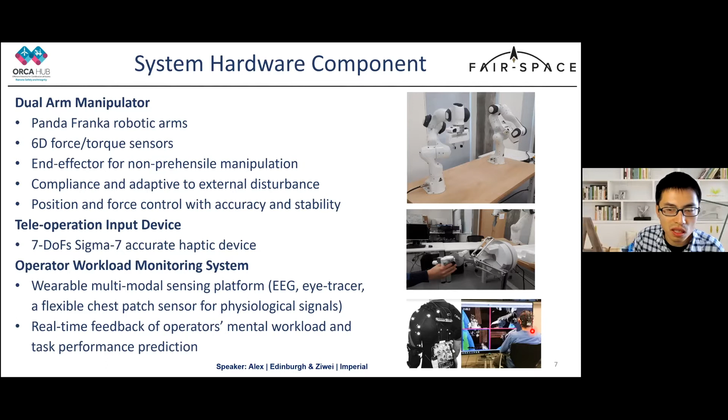As you can see, the human is sitting in front of this multi-modal interface, with EEG and eye tracker, etc., to monitor the human load.

Specifically, we design missions similar to space construction and assembly of large structures, as mentioned before. Here's the setup we use. We applied industrial connectors and a modular design like this to resemble space debris removal in terms of capturing the object, and also space assembly in terms of docking and connecting different standard modules. So this is how they're connected.

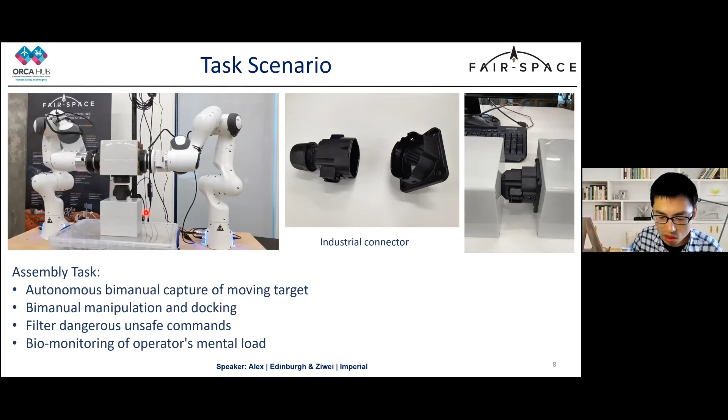On the remote side, there are two components: the remote side local control. The local control has two parts. One is variable impedance control with adaptations, so any mistakes or human errors will be naturally corrected here to ensure it's safe to operate in space.

Another autonomous mode will naturally take over when the human mental load increases, or when the communication delay increases—when there's too much latency, loss of packages, etc. When the communication is compromised, we automatically switch to autonomous mode. This dual mode operation ensures the resilience of the tasks.

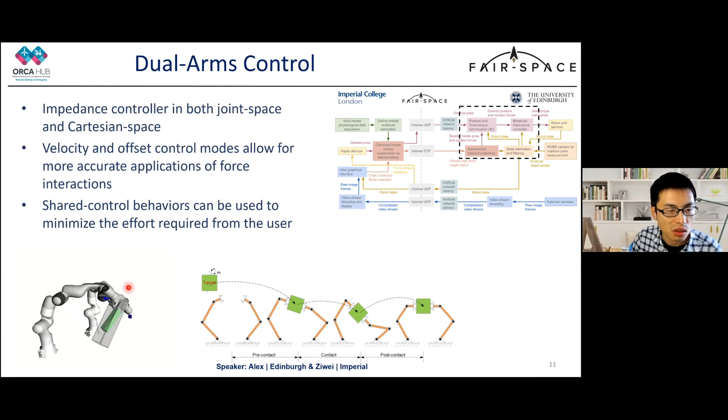Here is a simple demo to show: the operator can give an arbitrary command, but the robot will do exactly and precisely the safe motions as much as possible, so nothing is violated. All the physical constraints are compliant here to ensure safety and feasible operations—this is very good to prevent any human mistakes.

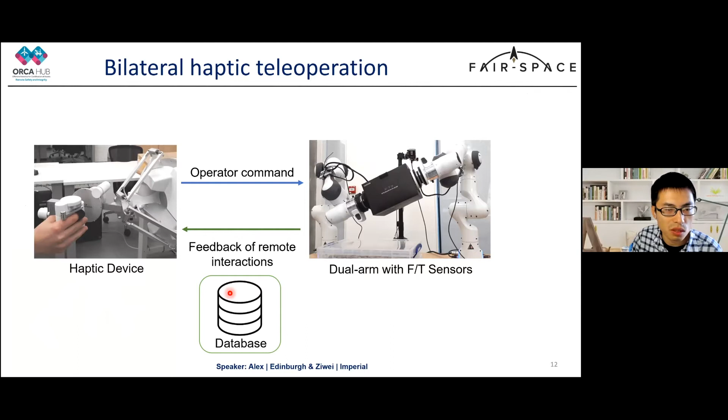Given this whole structure, we are able to collect a lot of operation data. When teleoperation is running in normal mode, we collect a lot of data and establish a database. As you can see, we can perform grasping tasks, for example, grasping and manipulation tasks using the dual arm.

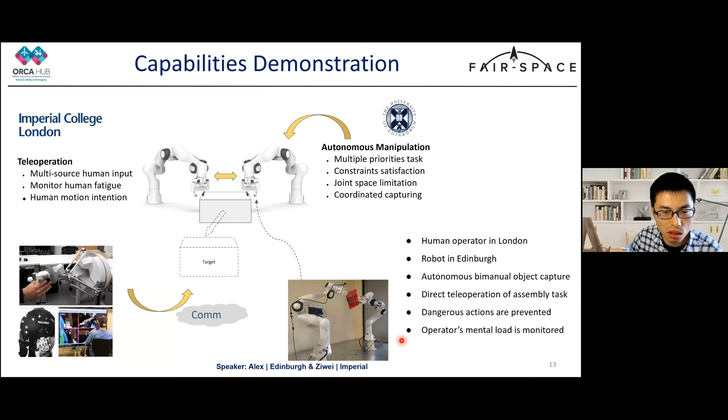We are going to show a lot of demos—not just grasping, but also docking. For example, here you can see the docking task demo. Similarly, we can perform a lot of demos, and I will move to the next.

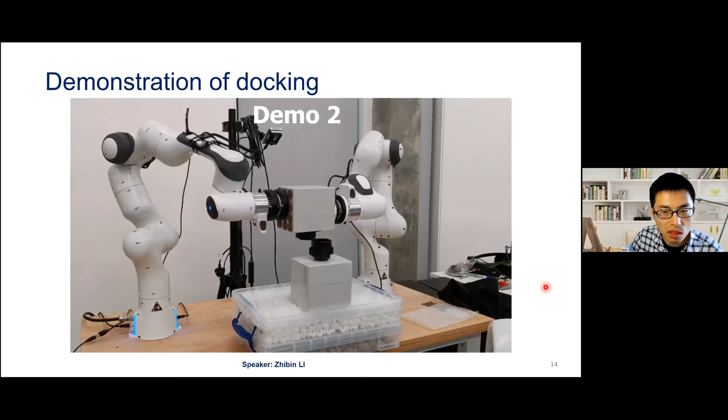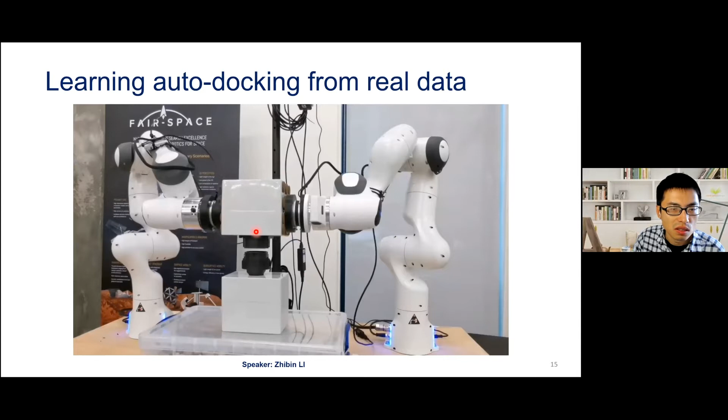You can see here, this is the autonomous mode. What happens is that based on all the data from human bimanual operations, we can learn the docking autonomously. As you can see here, it is quite reliable.

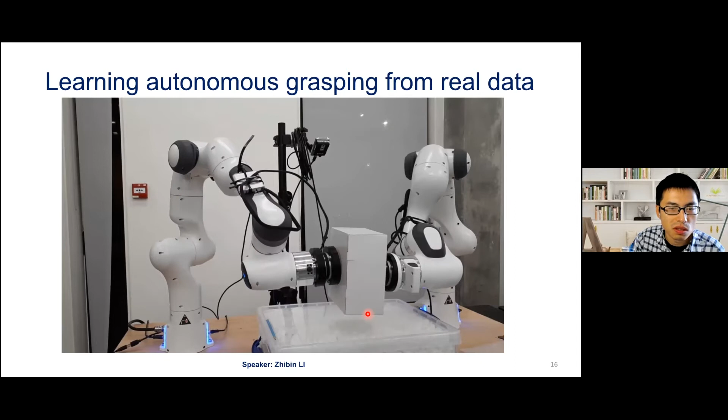And also the same technology can be used for object capturing, which resembles space debris removal. So everything is done autonomously. So far things are done in a blind manner, but here I'm going to show you how we can integrate visual feedback. So this is purely autonomous using visual feedback: the robot has an external camera that sees the object, and the capturing part is done autonomously.

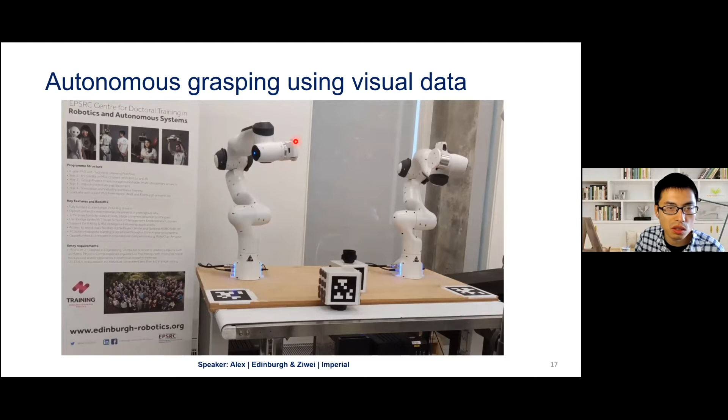As we said before, we have the control software and the whole infrastructure sitting behind it that naturally coordinates between the autonomous mode and teleoperation mode. The capturing is autonomous because it's a routine, repetitive task. It's very smooth, repetitive motion, as you can see how it captured the first object. And then once it's captured, it switches back to the human operator, who takes over teleoperation, because assembly requires a lot of contextual understanding.

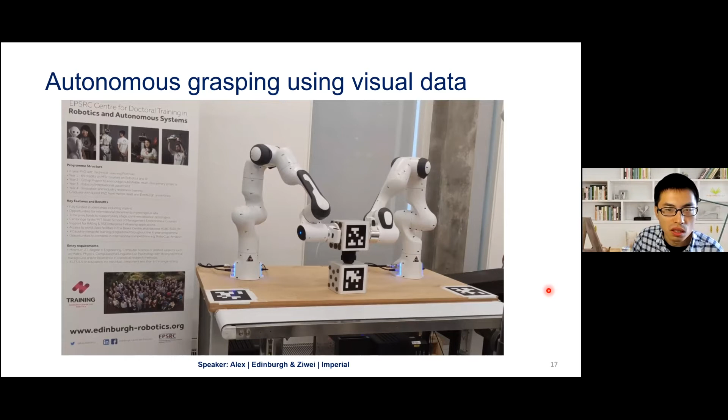What if the object moves, for example? This is teleoperated, and you don't even feel the glitches when it switches - the software takes care of the switch. This is thanks to the local control that guarantees the stability and smoothness of coordination between multiple modes. Next, we'll talk a little bit more about how human monitoring is done during teleoperation mode and shared control between the autonomous mode and the teleoperation mode.

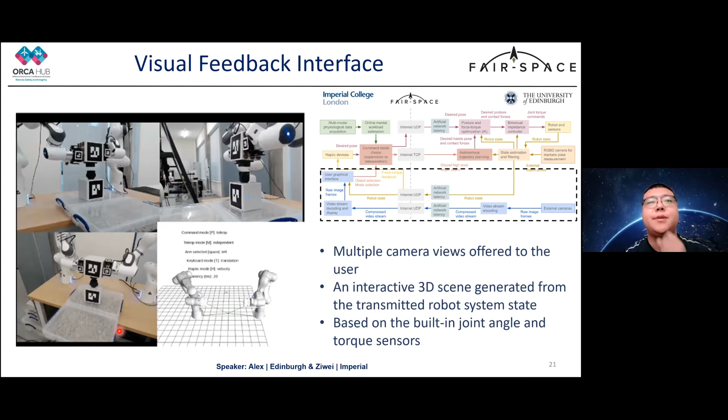So this interactive view can be further enhanced with the representation of the task states through the use of fiducial markers placed on the target objects. This offers pose estimation that can be visualized in the interface. So, next one.

The next one, we consider the human operator on the ground. We would like to use this operator command interface consisting of the two Sigma 7 devices with the support of Microsoft HoloLens, which is used to provide the gaze information that facilitates human mental load estimation.

This mental load estimation is carried out in this early stage testbed that uses the eye tracking data provided by HoloLens 2. Gaze focus features such as saccade frequency, fixation duration, blink frequency, and blink duration have been shown to be connected with mental load, so in this way human mental load can be estimated in the system.

The current system favors monitoring mental load using eye gaze from head-mounted displays for ease of acquiring the signals. The eye-related features are just one of many signals that can be used for mental load estimation.

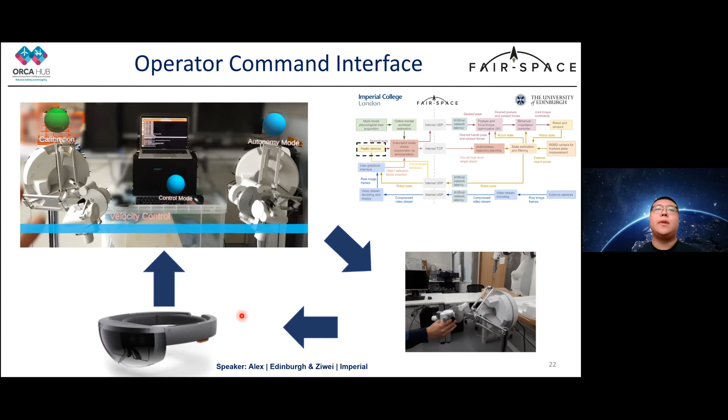Not only based on gaze tracking, we consider more physiological signals connected with mental load estimation. We developed a new wearable sensing platform consisting of a 32-channel EEG cap, a Pupil Labs eye tracker, and a flexible wearable sensor that can capture physiological signals like ECG, GSR, body temperature, and heart rate. All sensors are synchronized using the lab streaming layer.

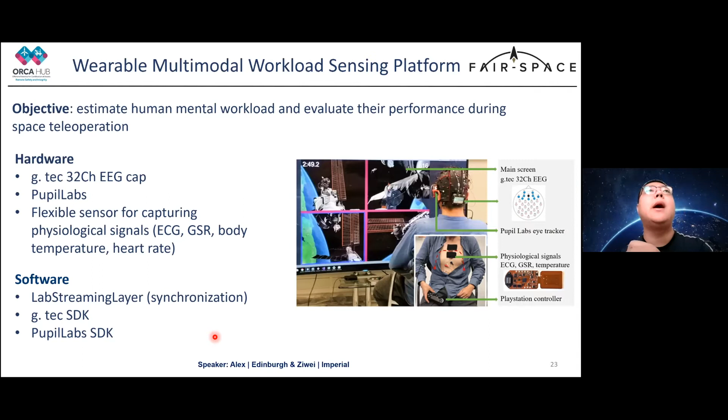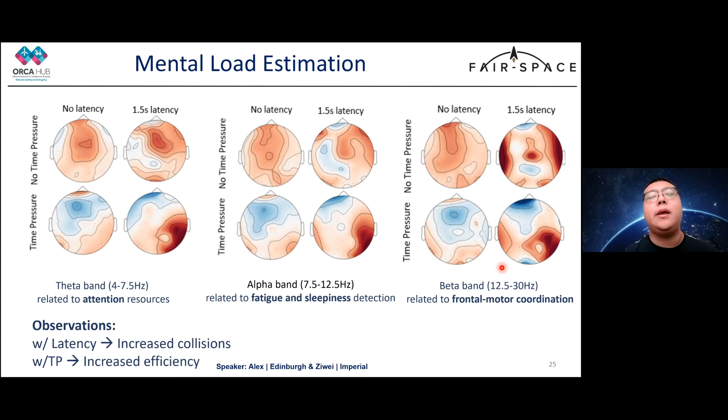The issue that latency will definitely increase human mental load, as well as reduce operation performance, should be considered in the control design for teleoperation.

As I said before, latency should be considered in the control design. We like to know to what degree delay will influence haptic communication, so we need to answer two questions: how do humans react to delay during haptic communication, and how does this affect performance and perception?

The previous human-human interaction in our work is changed into human-robot interaction. We introduce a robot partner to provide collaboration with the human operator, and we consider different time latencies from 0 to 540 milliseconds, comparing human performance with time delay against solo operation.

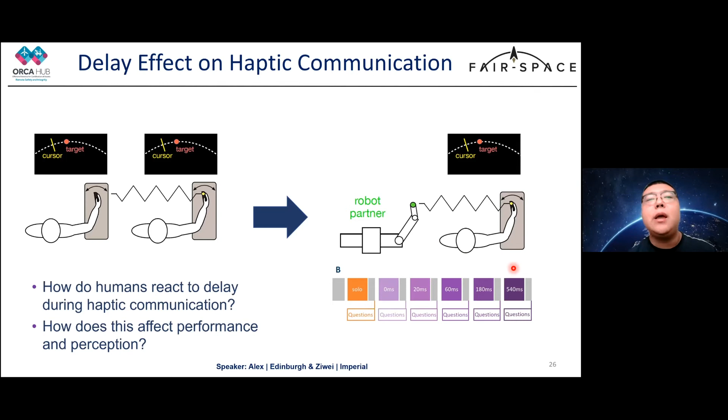We can see from the results, figure A shows time delay versus RMSE. The accuracy between 0 to 60 milliseconds is not changing so largely. We can see the accuracy of the 20 to 60 millisecond delay levels are similar to those in the zero delay condition.

Figure B shows time delay versus SPARC, which is the indicator of smoothness, and this result can also be proved in the smoothness experiment. Even at high delay levels, the performance has not been influenced so much compared to the solo condition.

But we can see from the two figures, when the time delay increases, subjects will recognize it even at small delays, and they adjust their motor behavior to compensate for the latency.

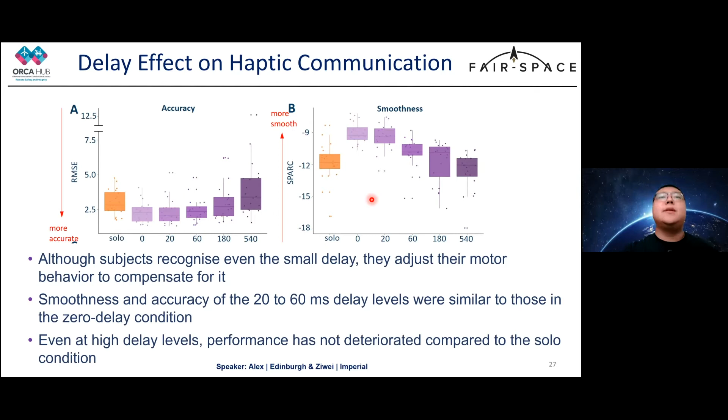After the experimental block, we asked a number of questions to the subjects based on the NASA questionnaire regarding the subject's perception of the interaction.

We can see the subjects could recognize a change in the interaction when the time delay is over 20 milliseconds, and they perceive this effect as the delay effect. This change is also associated with resistance and noise.

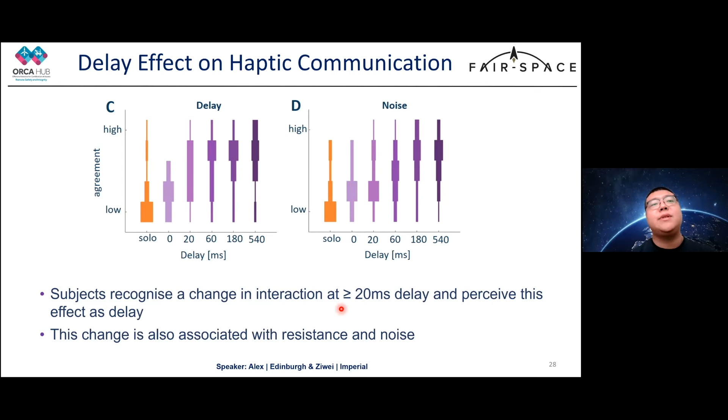Based on the previous works, together with Edinburgh, we can develop the shared control, solo, or totally autonomous control mode for teleoperation tasks. The variable autonomy manipulation for short-range services in space is a promising tool to address teleoperation issues, and translating innovation research into impactful techniques with high TRL for the UK space industry is very important at this stage, along with the social impacts that will benefit use in remote or physically distanced settings.

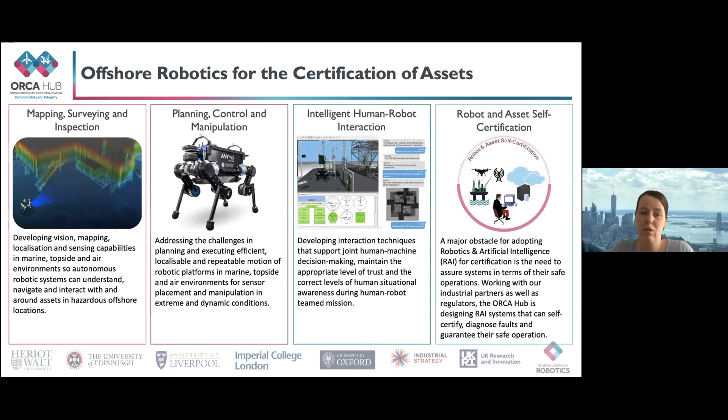Just to give you a bit of background, that's where I'm coming from. The ORCA Hub has four work packages, and we are here talking about intelligent human-robot interaction, where we basically design, similarly to the first talk, the interfaces for how we can use them in a more efficient way to control our robots.

We started off and thought about how we can do this, and we basically said we want to have the human in the loop. That's why we are using physiological data to track them. We want adaptive interfaces that are able to reduce stress on the human, because beyond identifying the problems, we also want to give a more simplistic interface to the user so they can still perform efficiently under pressure. We also look into autonomous and semi-autonomous robots, but I'm not sure if I'll get to that today. And of course we also want industry involvement.

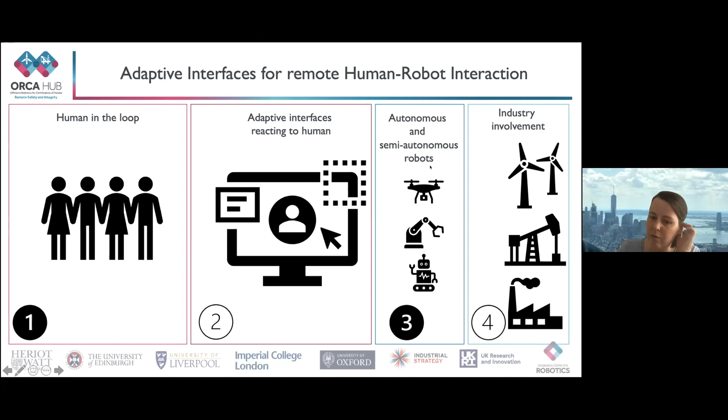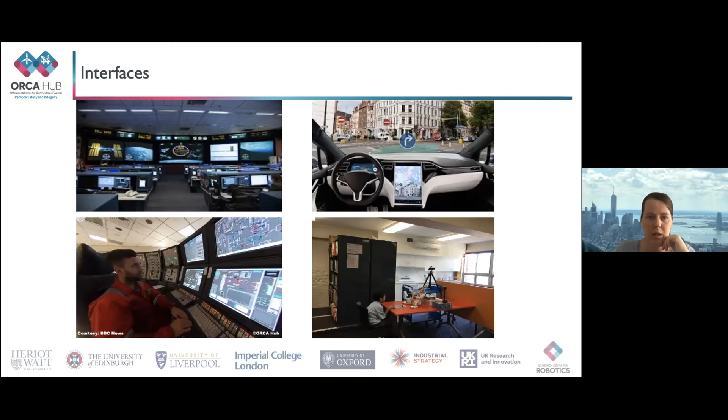So these are the interfaces we are talking about at the moment, mostly control room environments. The example of the BBC's news picture on the bottom left is one of our target environments, but we also have human-robot interaction in terms of real interaction, where maybe a teacher is then taking over.

Coming back to the definition of what we call cognitive load, which our colleagues defined more as mental load, we follow the idea of three different aspects: the intrinsic load, the extraneous load, and the germane load, where all of them play a role in cognitive load from our perspective. And we want to adjust those.

So what we did is very similar to our colleagues. We measured all kinds of physiological data. In this case we use the Tobii glasses, but we are also moving on to the HoloLens right now. We not only use eye gaze, but also pupil diameter, which I'm not quite sure you can get from the HoloLens at the moment, so we are still trying to figure that out. We also use blinking rate, which has been shown to be very efficient to measure. We measure heart rate variability and heart rate, and we also looked into gaze patterns and all of those.

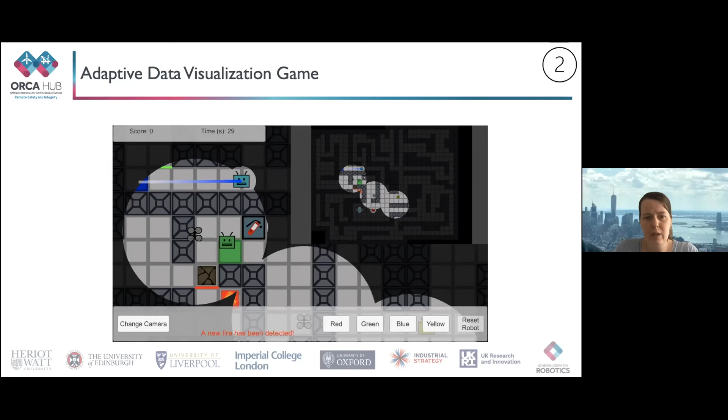We designed this game so we can use it with our learned cognitive load estimator, which gives us a prediction of what the cognitive load is for the user at a given time, and we adapt the interface based on that. So if the cognitive load value is high, we adjust the interface so it's easier for people to solve the problem, like going around to fix tiles, put out fires, or clean something, and so on.

All these details you can also see in our recent publication. In the end, we managed to do this, and we managed to adapt the interface based on the cognitive load. Luckily there was not so much delay here, because we are not talking about far up in space control, but about one computer situation.

Finally, we also moved on and looked into how this affects the trust into our systems, because that was always one of our biggest questions.

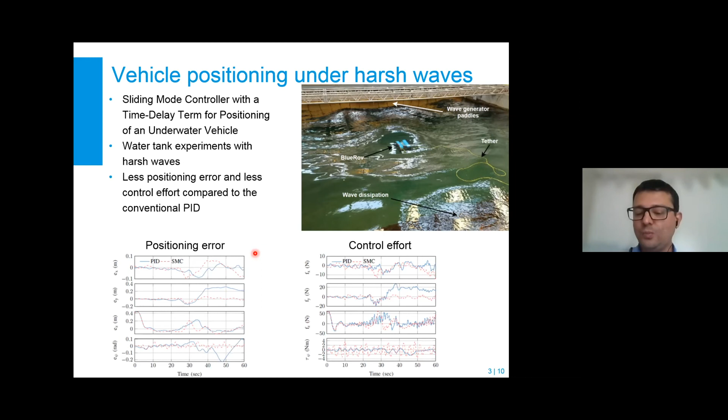We have introduced 100 millisecond time delay in signal communication as a disturbance. This is a disturbance - so time delay control is something different than the time delay disturbance. In underwater systems, in teleoperated systems, time delay as a disturbance is a common thing that needs to be dealt with. So here we have that too, and we have dealt with that.

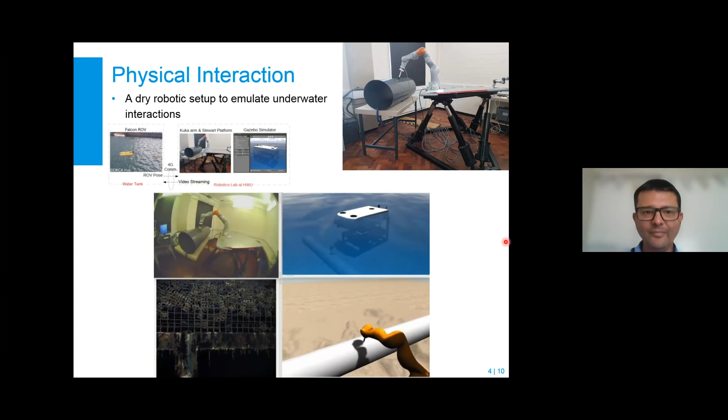So if you have such a system for manipulation on structures, you would like to control the location of your base, of your robot, in the best way that your robot arm attached to this base can perform optimally. This requires to decide or to find out where is the optimal position for the base robot. The conventional approach in the literature is that people mostly find an optimal position, then the robot arm performs action, then the robot base switches to another position, and in that position again the arm does an action.

So the robot base goes from point to point in a discrete way. We wanted to avoid this. We wanted the robot base and the arm move continuously and simultaneously in a synergetic way. And we developed an optimal base location technique, taking into account what the robot arm needs to do, what kind of trajectory the robot arm needs to follow, and then the base is optimally located continuously, and the arm and base move together, and the arm can act on the structure. The same technique is extended for the case of maximal force transmission.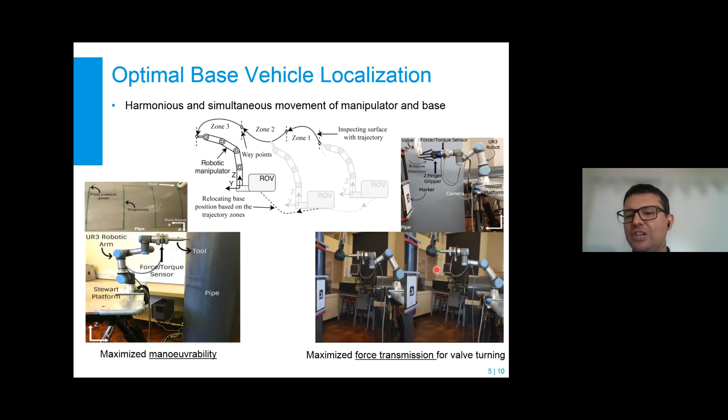So this is a video showing you how our optimal base location works synergetically with the robot arm manipulator. The robot arm is performing a task on the structure, and the location of the base is localized and moved with the robot arm together in a synergetic way, and the arm performs action.

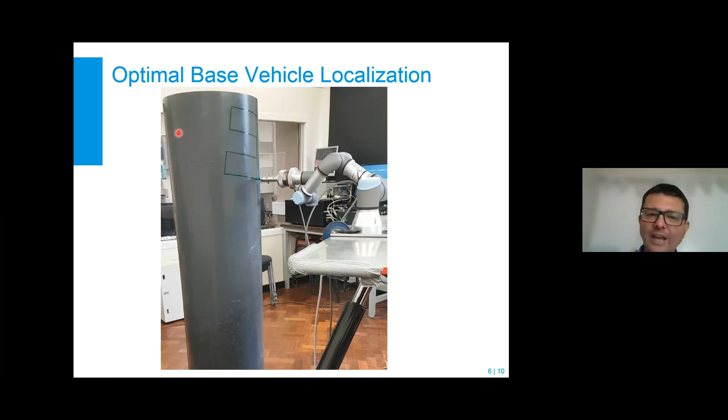I want to say that this action being performed on the pipe here is done without any vision, without any knowledge of the model of the pipe, or without any prior knowledge of the location of the pipe. The scan here, or drawing in this case, is performed only based on the force interaction. So the robot does not know in advance the surface structure or where the pipe is. The robot finds it, and just relying on the force interaction, it can follow the surface.

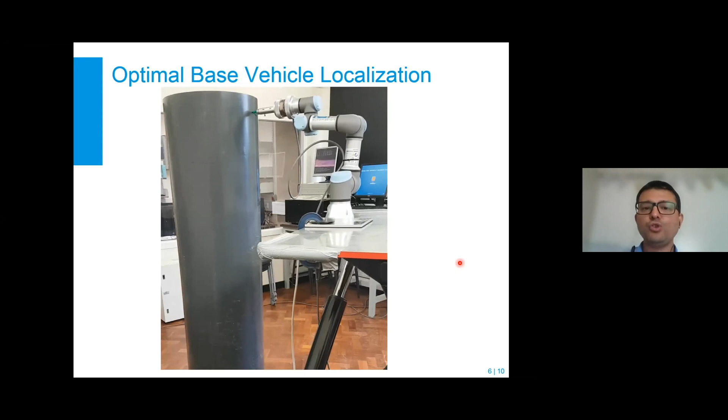Meanwhile, the base can act to make it most maneuverable for the robot arm. So in such a task, imagine that you have disturbances, you have a lot of external impacts that are moving the base, and from time to time, you will lose contact with the pipe because the base is floating.

This is a very important and peculiar problem to underwater applications when the base is floating, actually, when the base is not fixed. So we developed a switching control algorithm to handle such situations, which means that when we establish contact with the pipe, we perform a controller, an admittance control, and when we lose the contact, we switch to a different type of controller, which will smoothly bring the arm back to the structure. And this switching controller proves to be very effective and very useful and important, to be honest, to maintain as continuous contact as possible.

Besides that, due to the disturbances and due to different environmental structures, stiffness of the environment, the contact force changes a lot during operation. And for that, our studies showed that the controller needs an adaptation.

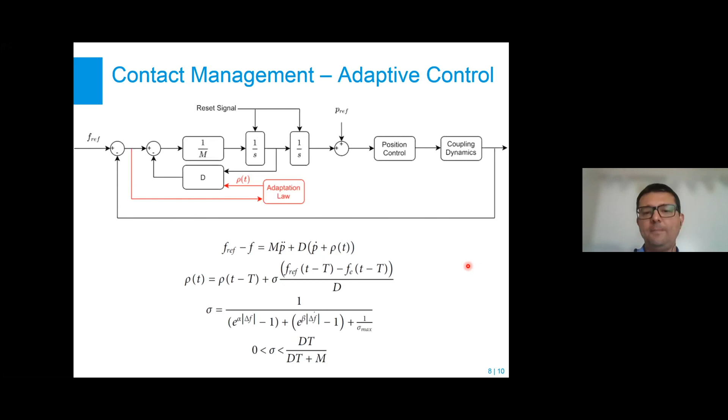However, when we introduced an adaptation law, in other words, when we implemented an adaptive admittance controller, through these equations, the detail of which I will not go, there is a parameter which is adapted, paying attention to the reference force and force error, and then our force control is regulated according to that and changed in time, and adaptive control is implemented.

So these were the things that I wanted to share with you today. I thank you very much for your attention. If there are any questions or comments, I'm happy to answer.

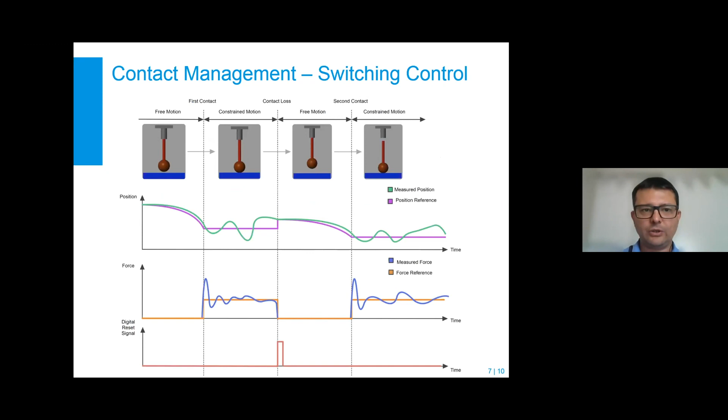For telemanipulation, there are other issues, and the main core issue is the communication of command signals and feedback signals between the master and slave sides. Especially underwater, there is a significant delay in transmission of these signals because we are under the sea; we cannot use electromagnetic waves in salty water, so we need to rely on sound, ultrasound-based systems, which are slow and introduce time delay. So this delay is a major problem.

Another thing is, underwater, the vision is not perfect, always blurred. The videos you receive on the monitor of the operator are always not very clear. So there need to be intelligent things that recognize objects and make decisions given the blurred images to help and aid the operator.